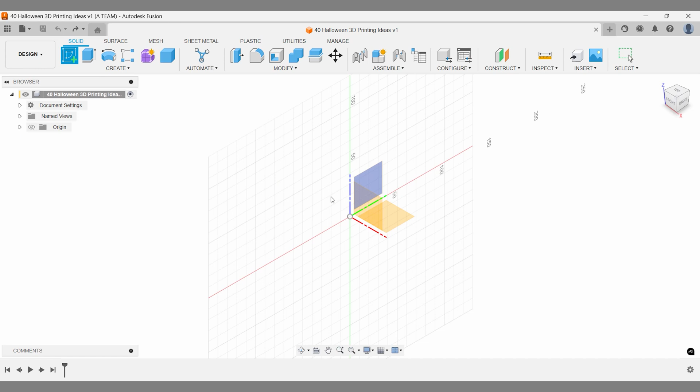Start your Halloween cup by sketching from the origin center in Fusion's canvas. Set the width to 27.5 mm and the height to 95 mm. Remove constraints to add an angle. Try different ones, but I recommend 95 degrees for this tutorial.

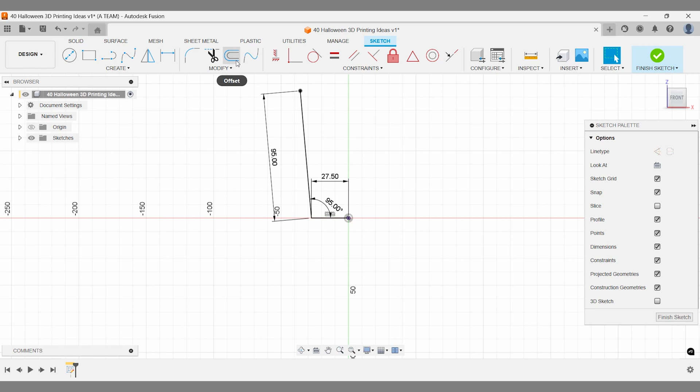Offset the sketch 4 mm for the cup's thickness. Use the line tool to close your sketch. Oversketch the top for a horizontal edge and trim any extra geometry. Then finish your sketch.

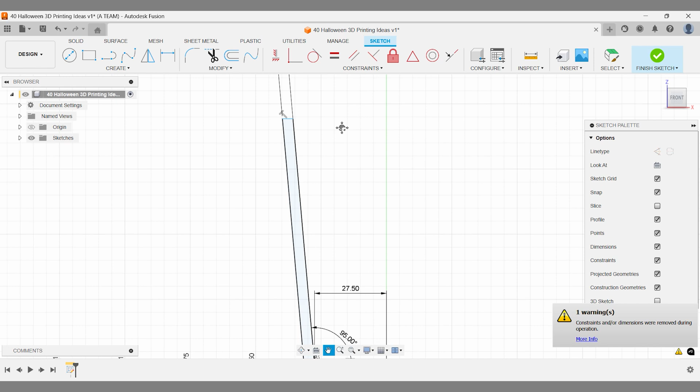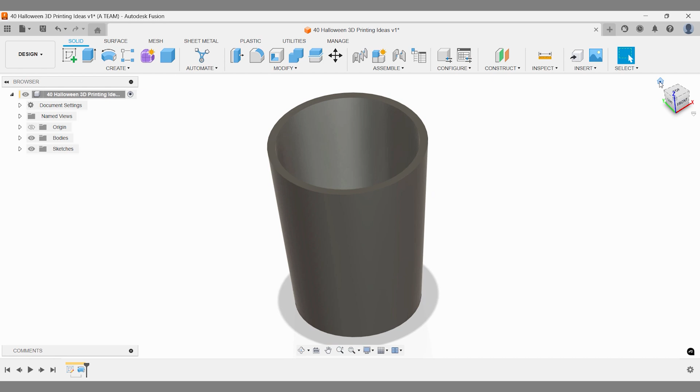Next, use the Revolve tool to create the cup. With the profile selected, choose the central axis, press OK, and adjust your view. We'll revisit the cup's top later, so let's put that on our to-do list.

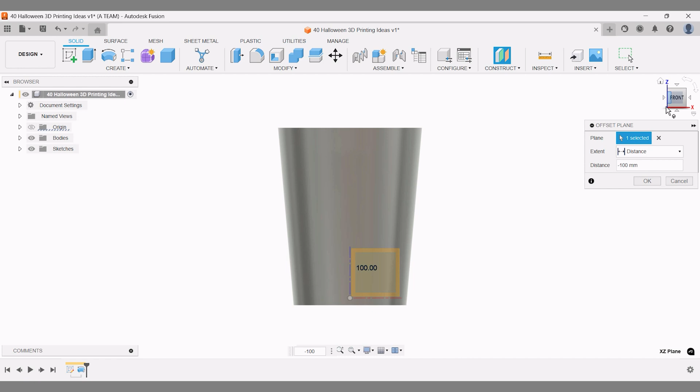Create an offset plane and place it just outside the cup. A little distance is key to avoid conflicts if you scale up later. Position the construction plane where you can easily access it with the view cube.

I'm using a licensed SVG for this tutorial, but you can also sketch directly on the construction plane or insert a DXF file if SVG isn't available. Use the center tools to scale, flip, and position the SVG quickly.

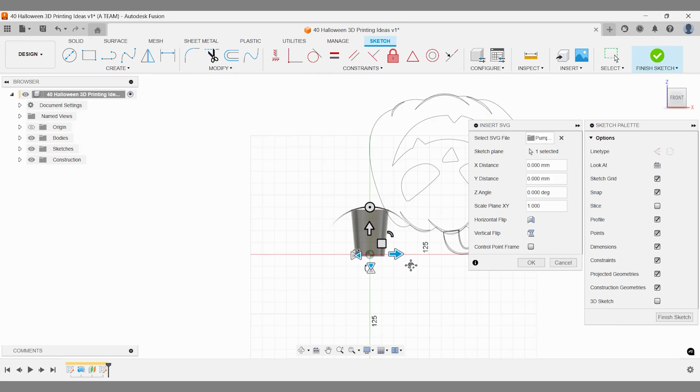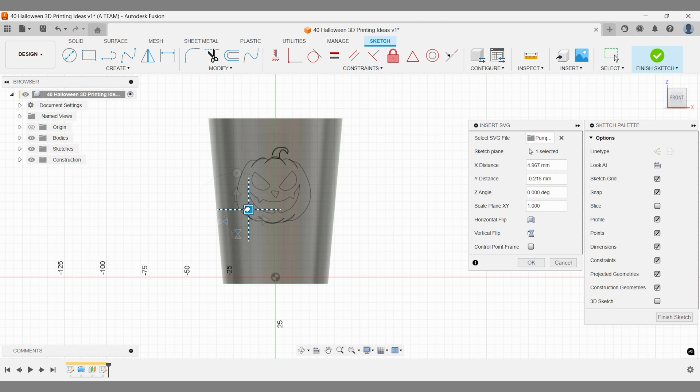This is a fast prototype, so positioning is casual here. Spend more time on dimensions if you're planning to 3D print or manufacture. The green lines show the sketch is fixed, which we can leave as is for now.

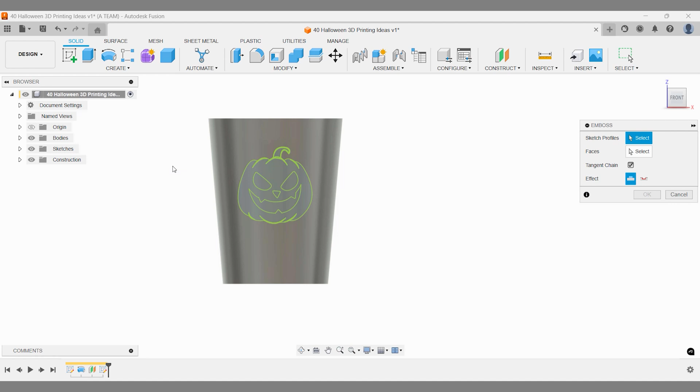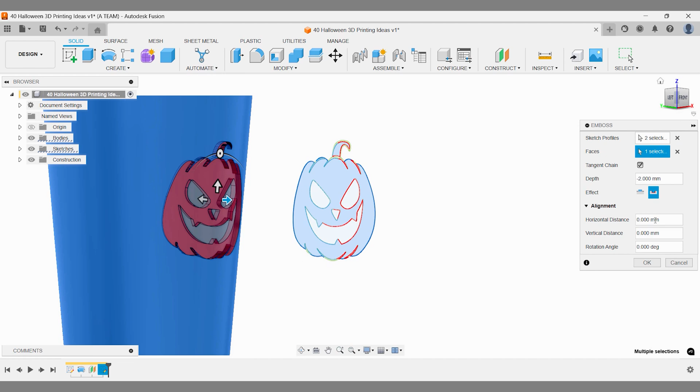Stay in the Solid Modeling tab, choose Create and then Emboss. Select your profiles and target face, choose the effect type, and set the depth. We won't use alignments here, but if you're interested, check out my screwdriver project linked at the end. Hit OK once you're done, and you'll see the emboss calculations in the bottom right corner.

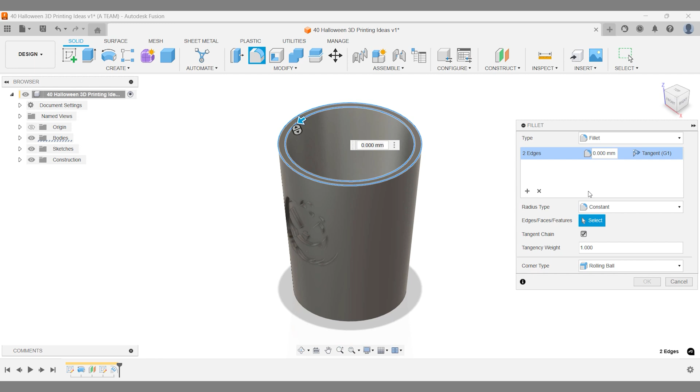Now, let's finish the top of your cup. I recommend the full round fillet for a smooth finish. Select the center face and confirm your action.

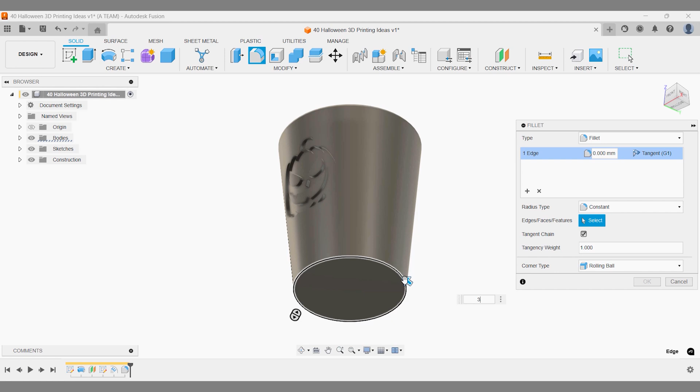Right-click to add a fillet to the cup base as well. Fusion remembers your last action, so switch to fillet if it defaults to full round. 3 mm looks good for now, and you can always tweak it later via the timeline.

Time to add some Halloween flair. Start by adding a dark, spooky appearance to the whole body. Switch to faces when needed to apply the colors precisely. Then, right-click to edit your colors, make it orange, and add a green matte appearance for the pumpkin's top.

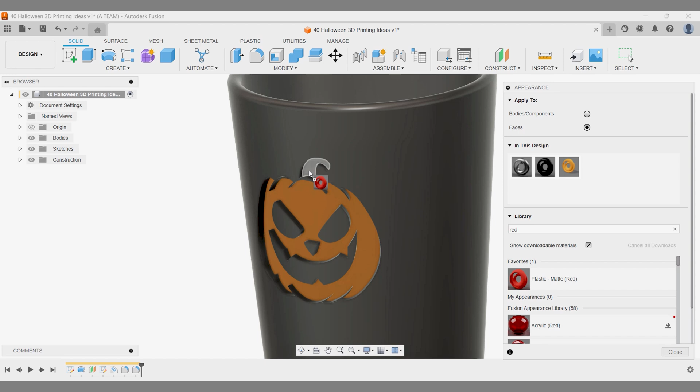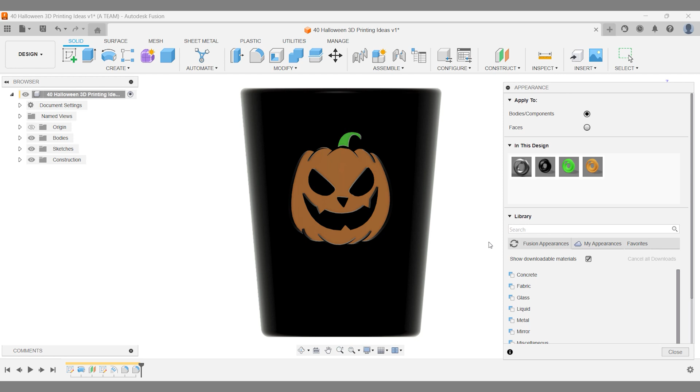Close the Appearance menu and review your design. If you want an even darker look with a brighter orange, revisit the Appearance menu and adjust as needed. Editing colors individually helps visualize the balance.